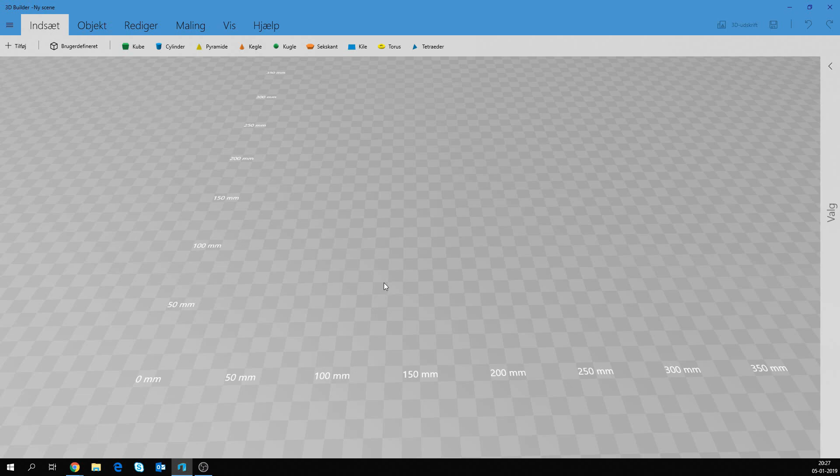Right. So next step is we're going to the computer and make our first model of this. Maybe there'll be many models, maybe the first one will fit reasonably well and we'll be done. We'll see.

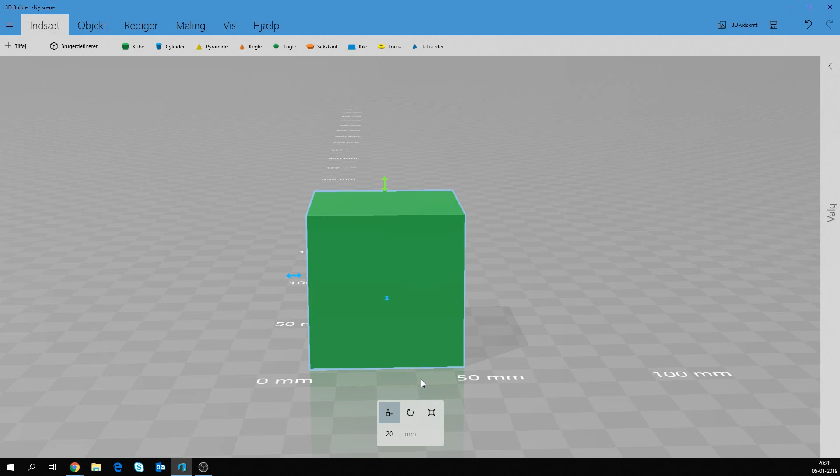Okay, so here we are. Now what I'm using is 3D Builder, and that's because it's really easy to get going, for two reasons. First of all, the program itself is pretty easy. You can't do any very advanced stuff, but at the same time that also limits the things you can mess up.

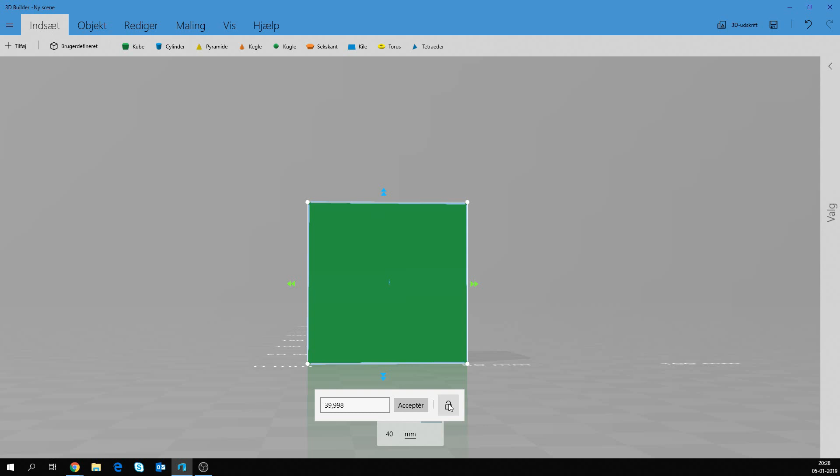And it's ready - if you're running Windows, it's readily available. In fact, it might very well already be installed on your system without you even knowing it, because it got pushed out together with an update like a year ago or something. And if not, you can simply go to the Microsoft Store, the built-in app store thingy in Windows. You can go to that and simply download it for free. So yeah, you can very quickly get going.

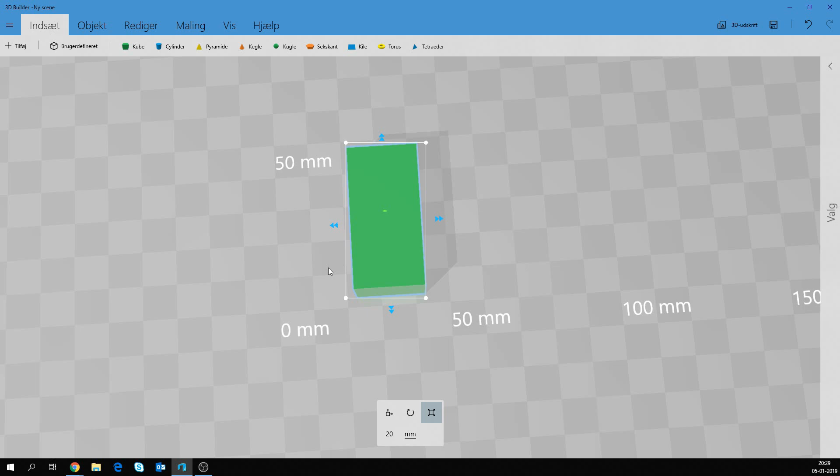So what I want to do here, I think what we're going to try to do first is create the basic shape that we want here with just a cube, and then we're going to cut out the stuff we don't need inside of it.

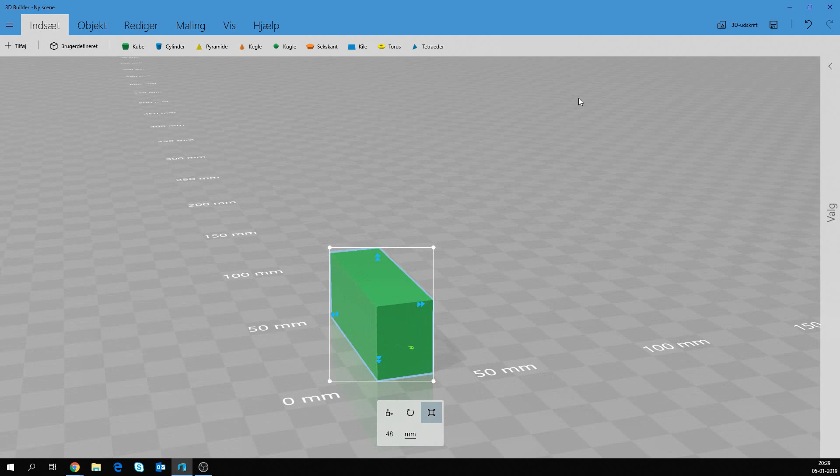So first of all, I think those brackets should be - let's go with 2 centimeters wide. So that we'll have it on, this will be the side view, so we want the top down here. Move, scale, and then we can go in here and remove the lock, otherwise it will scale all sides and not just the one dimension that we want here. That was the wrong one.

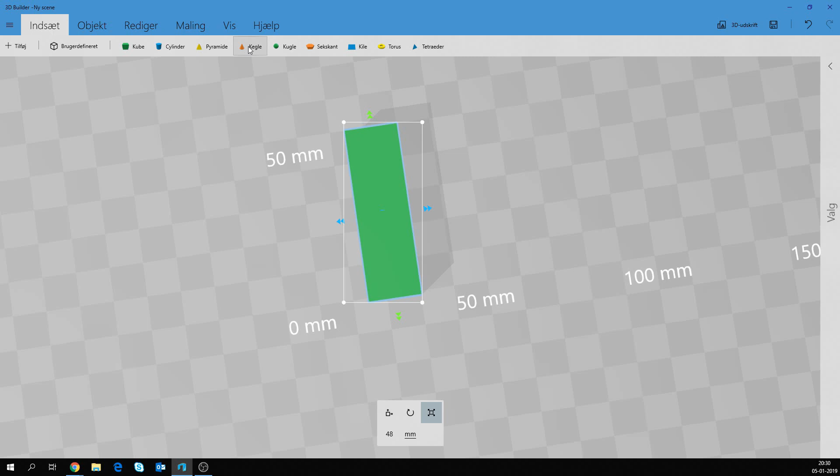So we'll try that again. Okay, so now it's too high. We'll move it down to be lying flat. And then we need it to be - let's see, that was 1.3 centimeters wide, that bracket. So, and we want it to wrap around on the one side and wrap around on the other side. So we need to add a few millimeters.

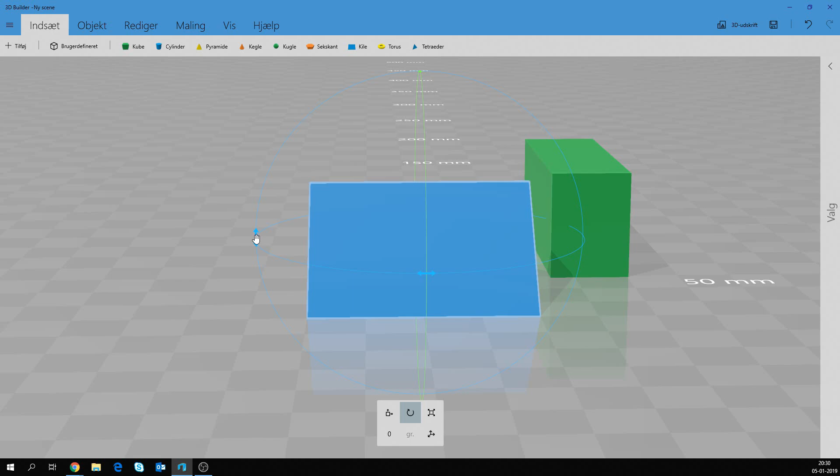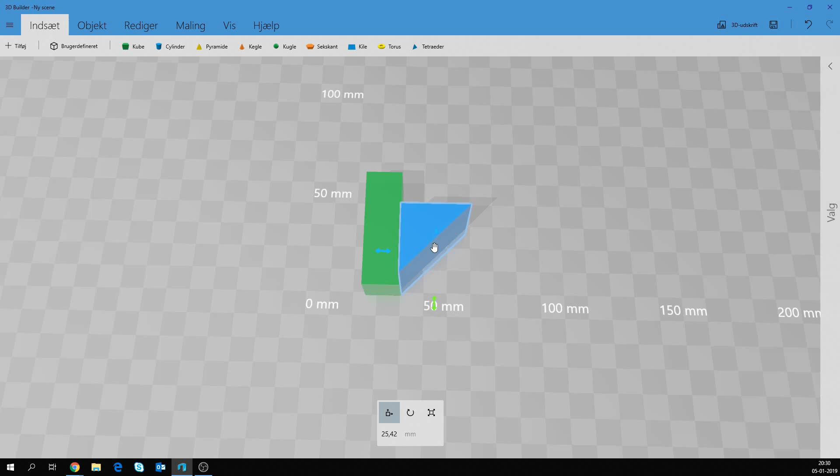So let's say we go with 1.6, then we'll have 1.5 millimeters on each side for the actual bracket here. So we'll go 16 millimeters wide. And then tall, we'll do the same thing. It was 1.4, I mean, so we'll go 4.8 - 48 millimeters. So that's the basic thing we're going to cut out our thingy from. Now we want a triangle.

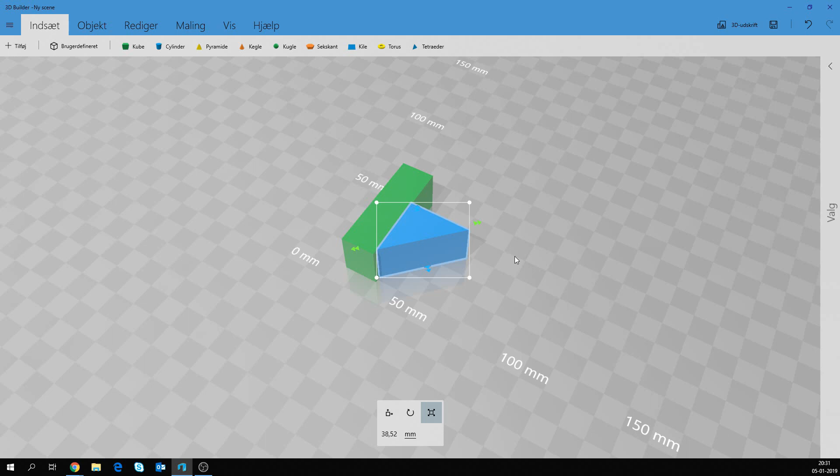What the hell? Not a pyramid, not this one. So if we look at this, we can see that we have - what the hell? Yeah, that's something we don't get a straight triangle with a 90-degree angle. Well, you do, that's at the top, but we need it to be at a totally different angle that it won't lock to, so that's kind of annoying.

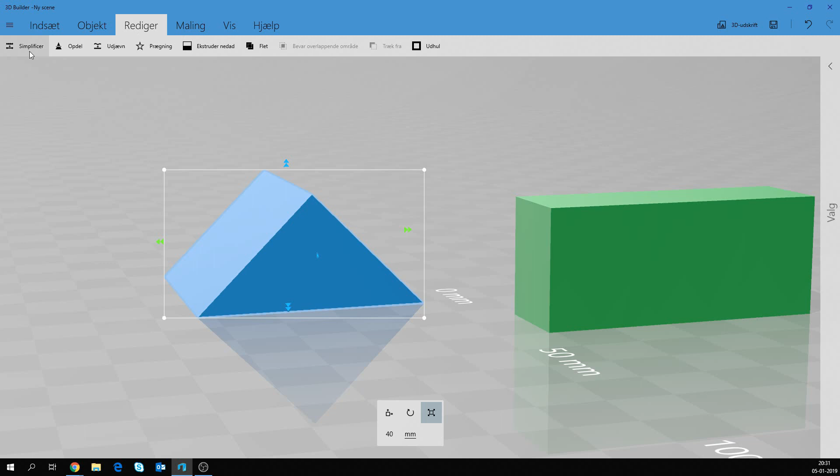But let's see if we can maneuver it into place, otherwise there is a little hack we can do. Basically just want to do - yeah, we'll just do like this. That should fit. So that will be our 45-degree angle here. So we'll move this down there. And we just need to scale it. So go to this menu and do the same thing. It's unlocked, 20 millimeters high.

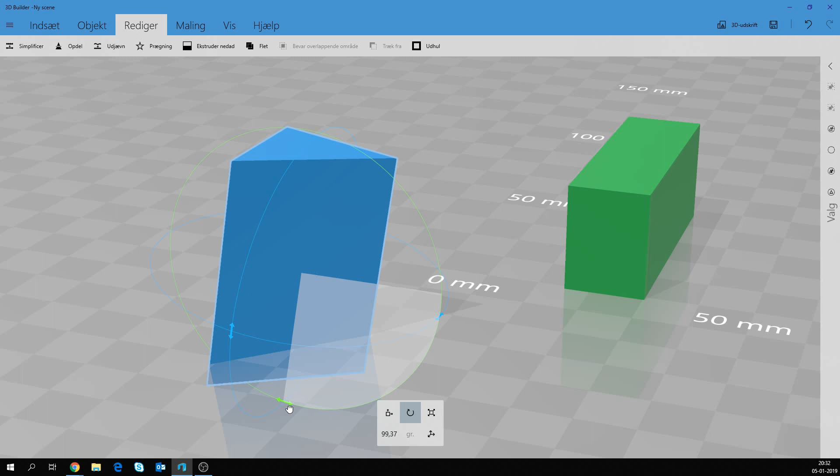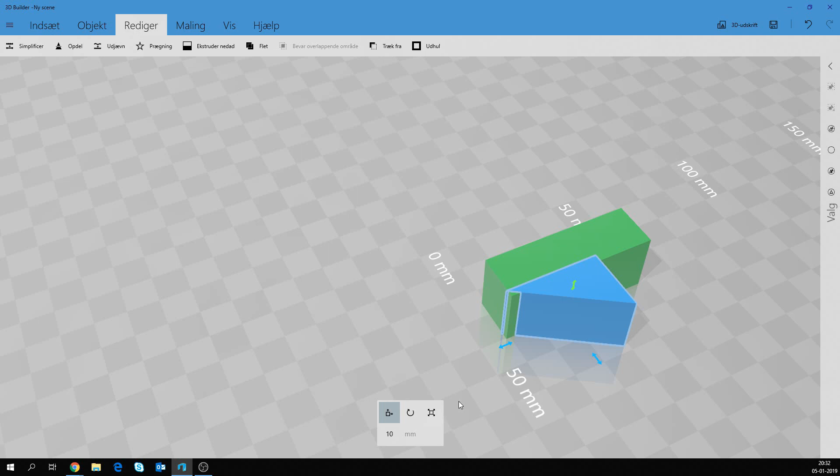Yes, and now the problem is we can't actually just tell it that this side should be that, which is a problem. So what I usually do in a situation like this, where the angle is on the wrong side compared to how we're scaling it, is take our triangle here when we go into edit.

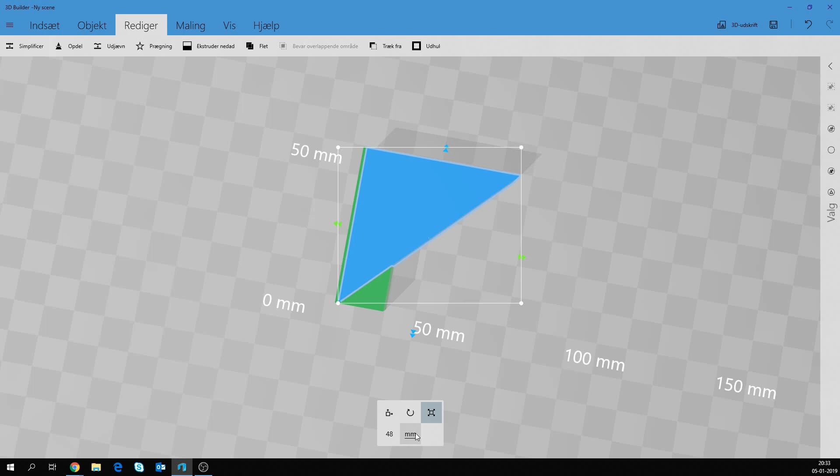You saw this is running in Danish, but it should be in the same positions. So we go to the Rediger, or edit, menu. We're gonna cut it, at a 90-degree angle, we'll keep one of them, it doesn't matter which one. I'll try to rotate it into place again, the other way around, 90 degrees, move you over here.

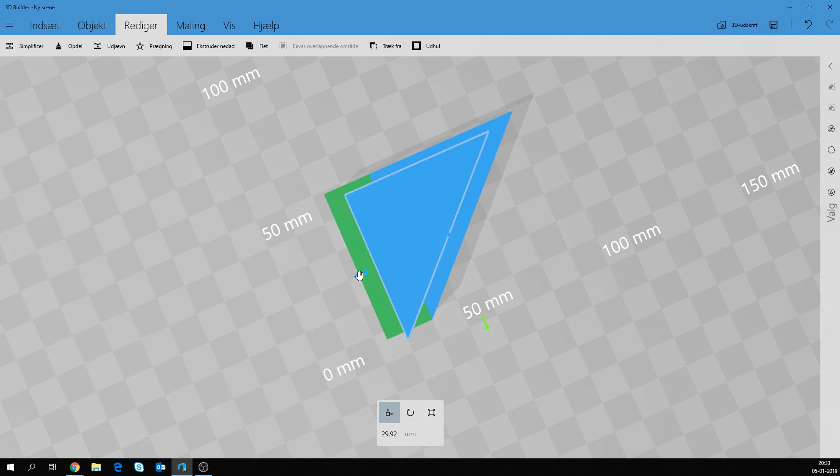Then we'll say we want you to scale 20. And now we can move it into place. Now we can actually drag the right side of it, the right orientation compared to what we want to scale here. So we can put that there, and scale it again the other way, up there.

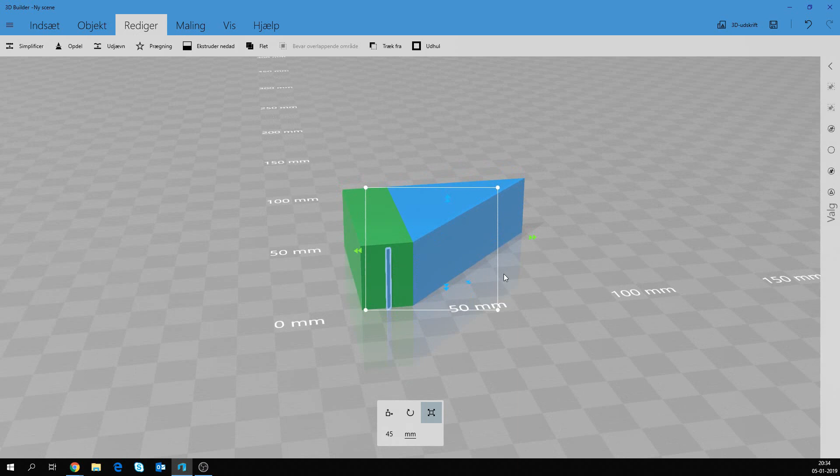Let's say 48. This should snap onto there now. So if it's 48 on that angle, then we also want it to be 48 on the other to maintain our 45-degree angle. So that'll be 48.

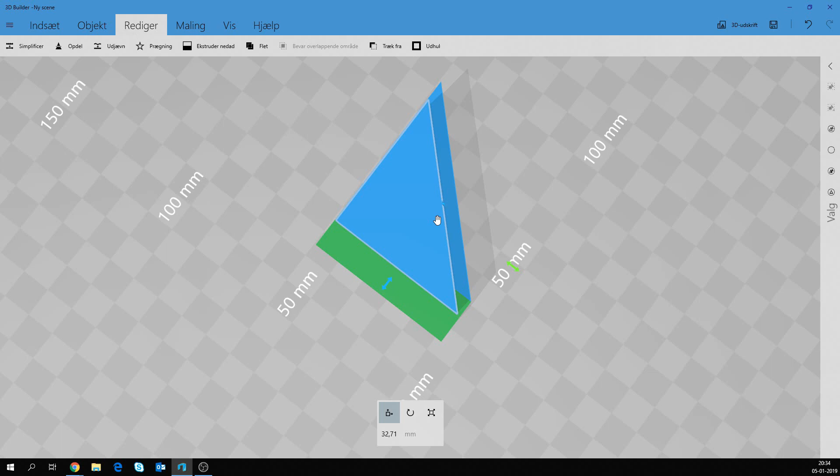So this is our basic shape now. Oops. Well, if I can stop messing around with it.

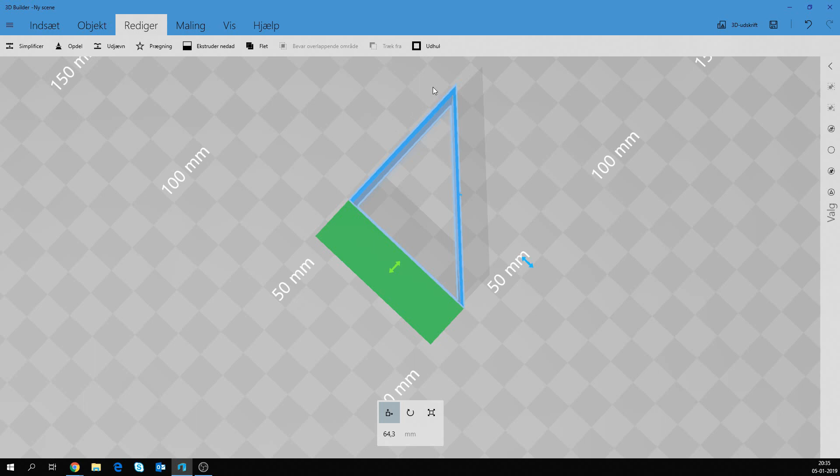So now what we want to do is cut out the inside here. Basically I'm gonna take this and make it slightly smaller. We're just gonna scale it in percentage. Could just do it in percentages, let me think about that. But I can lock it again, so now it maintains the scale on all the axes.

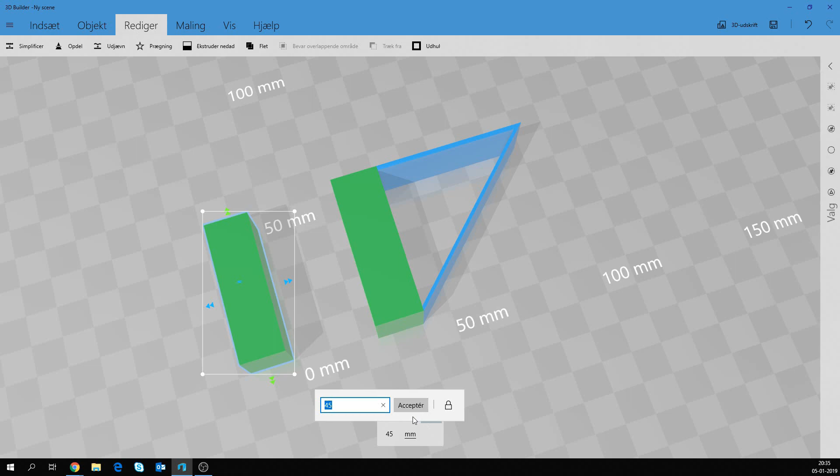And then I'll say we want this to be 45, because then we're keeping the stuff that we wanted. And then I can go back in here and say unlock this, go with this one up. Move this in here, and then find the right spot, roughly there.

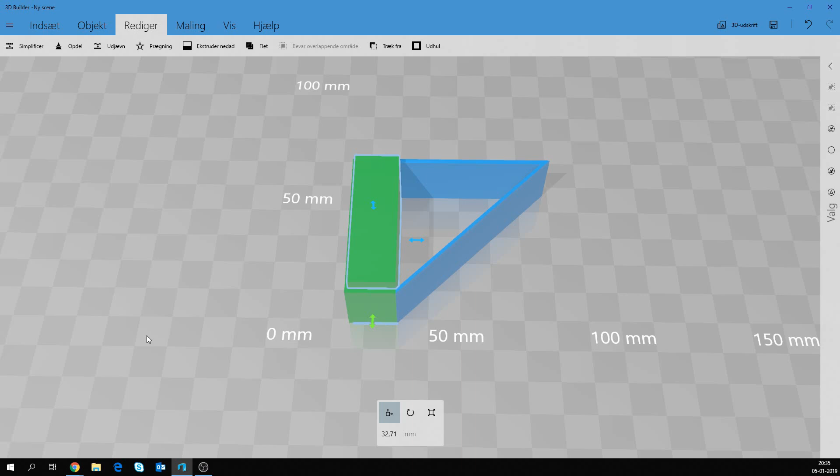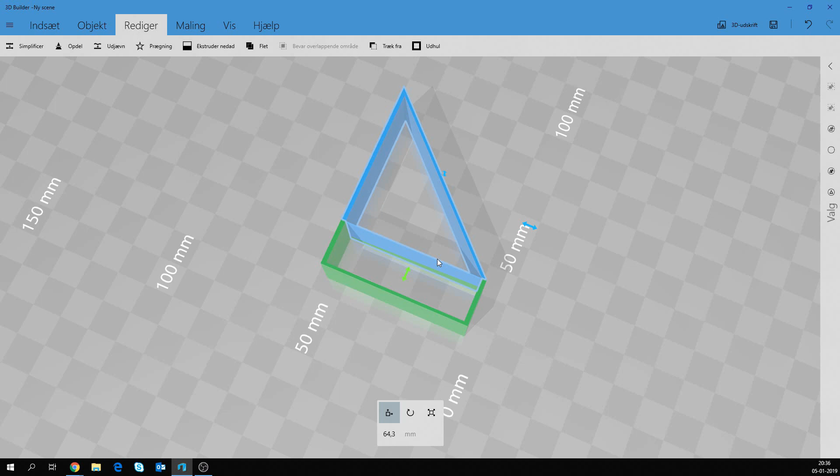If you do like that, so we can do træk fra, which will remove the inside here. So we see, now this is hollow. It looks too thin, probably. So we'll probably need to make it stronger, but we can just make sure it actually fits first, and then we can work with it.

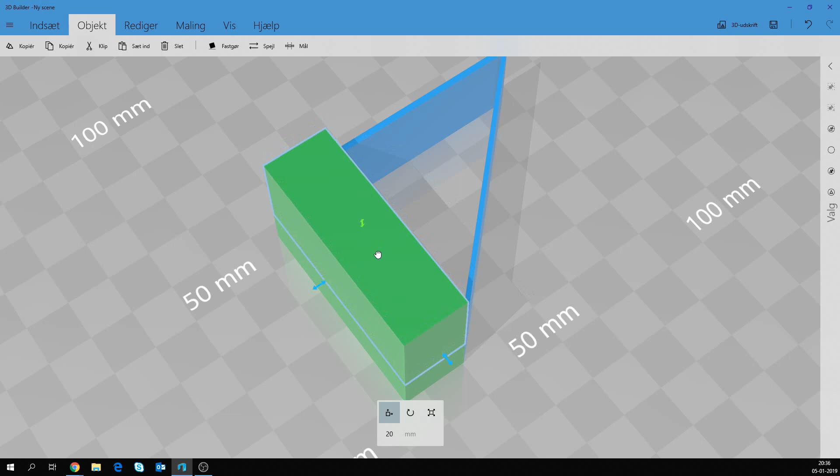So we can go and do the same thing with this and say, well, we want you to scale down to, lock this again there, 45, unlock, pull this up, and then we want to lock you to that side, drop it.

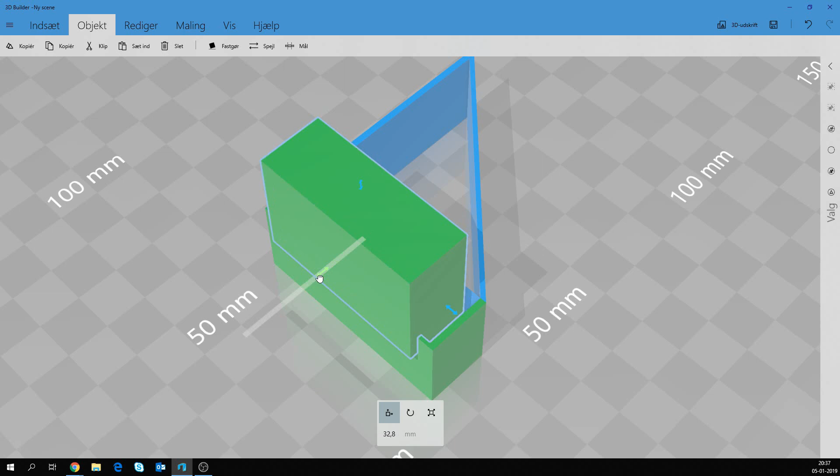Now the thing is, with this we can't quite do the same thing, because we need those tabs down here to hold on. But maybe they don't actually have to wrap around. Maybe it's enough they just go to the side there. I'm thinking that might actually be enough.

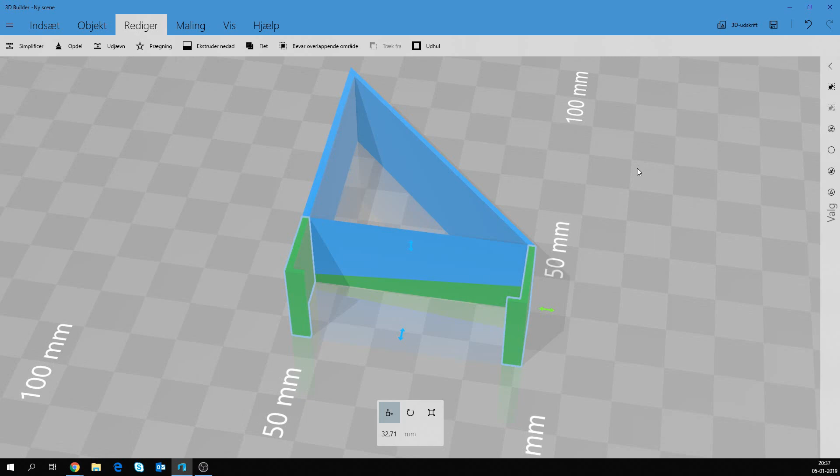So if we just remove that—oh yeah, that sometimes happens. That's really annoying. I'm not sure why, but sometimes this keeps something that's less than you can measure, but it just keeps that side there. We'll clean that up afterwards.

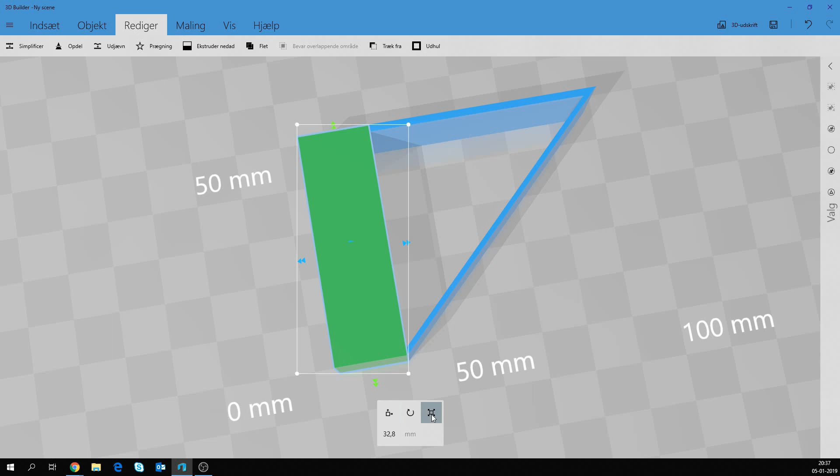But what we could do is do this, and then we can maybe get this back here. Because that doesn't matter, but really what I just want to do is make something that, if it wraps around like 2 millimeters each side, it'll be 45, 41, let's just go 40.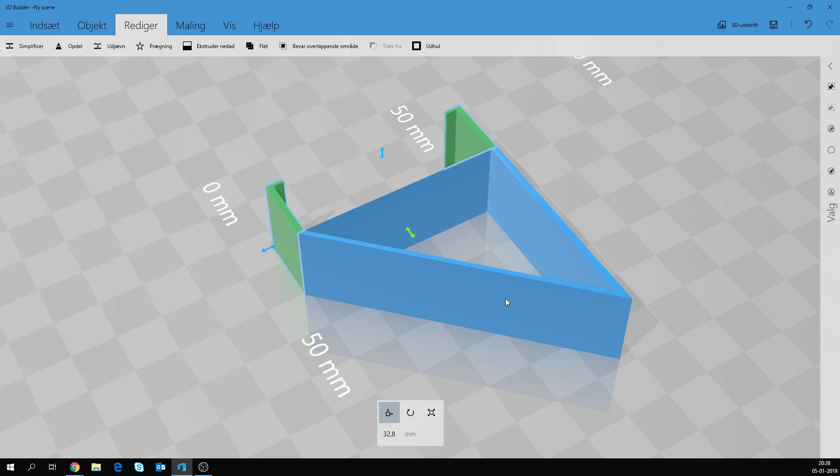And then move this here, drop it down, and make sure it's in the middle there. Yes, so again, remove that. And we've pretty much got our basic shape, except we've got this annoying thing in the middle that's actually not supposed to be there.

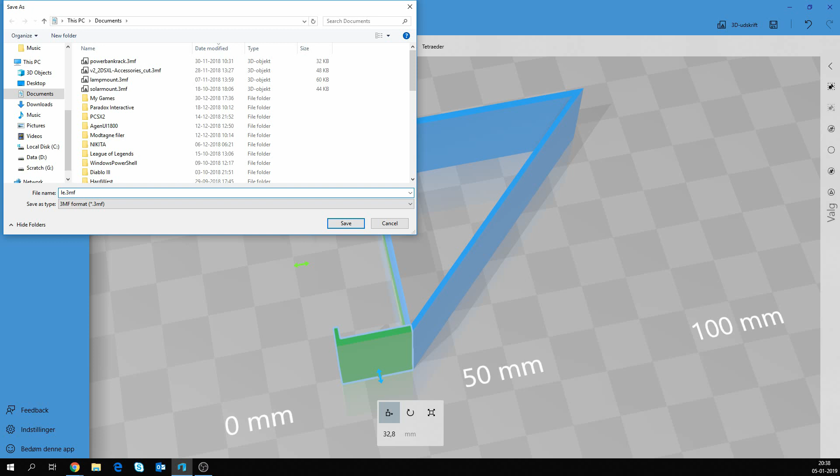Let's see if I can get rid of that, it's the easiest way to do that. If we just do this again, 45. Move you this way, and I'll cut that, I'll cut it down there. That's not good.

So this is an annoying bug, because I really consider this a bug. It shouldn't leave that there, it really shouldn't. But let's just try sticking this into a slicer, because it just doesn't really matter.

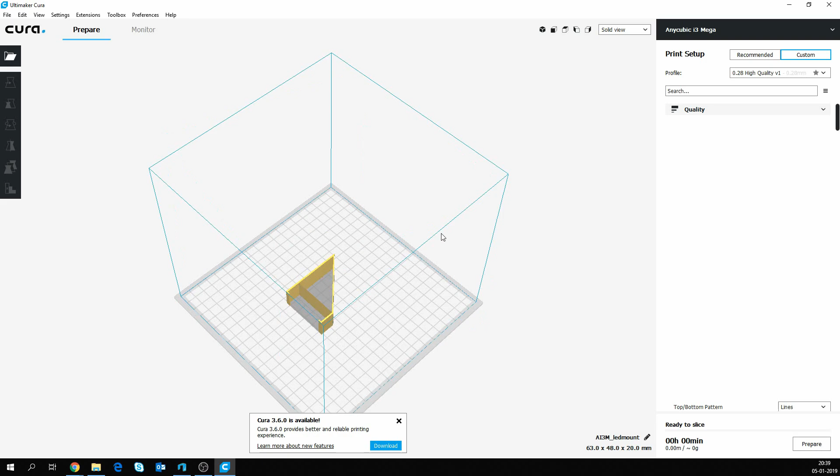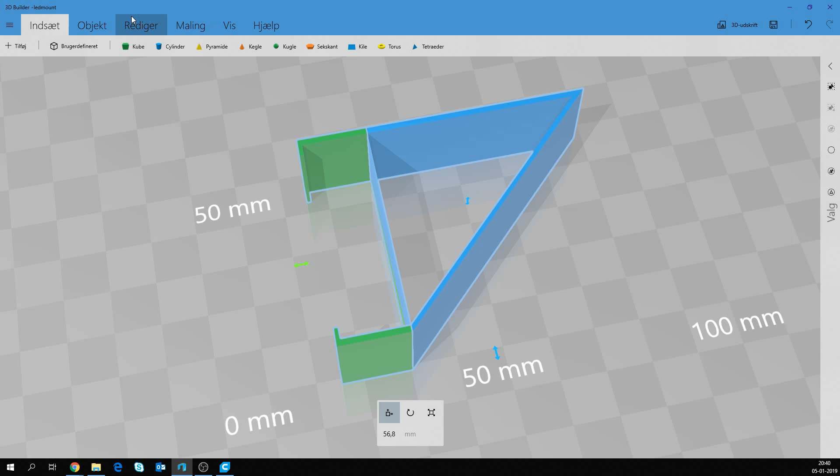So we can go and save this as something, some other stuff that I actually made myself. LED mounts. Yes, and we can also save it as an STL, and also it's gonna do some animation. We don't care, so I'm just gonna go and open this up in Cura instead, and then we'll see how it looks.

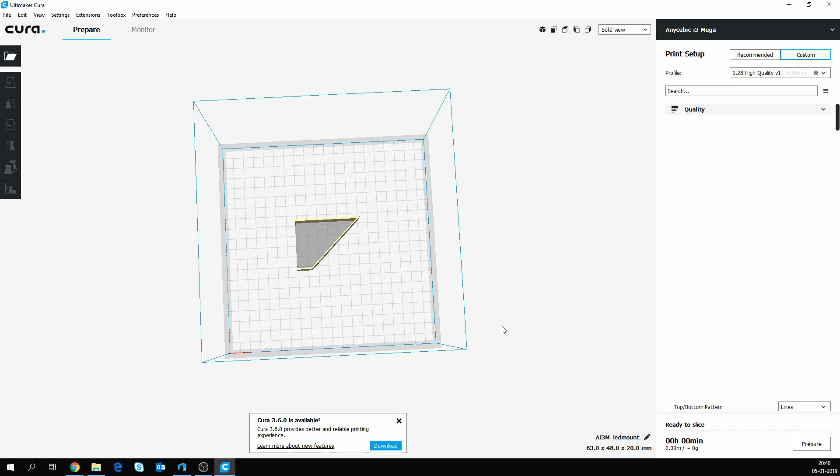I forgot one thing, and quite possibly Cura is gonna complain, but we'll see. Cura is loading. So unfortunately, it kept that thing there, even though it's just a shadow. I'm not sure it's even gonna be there if we slice it.

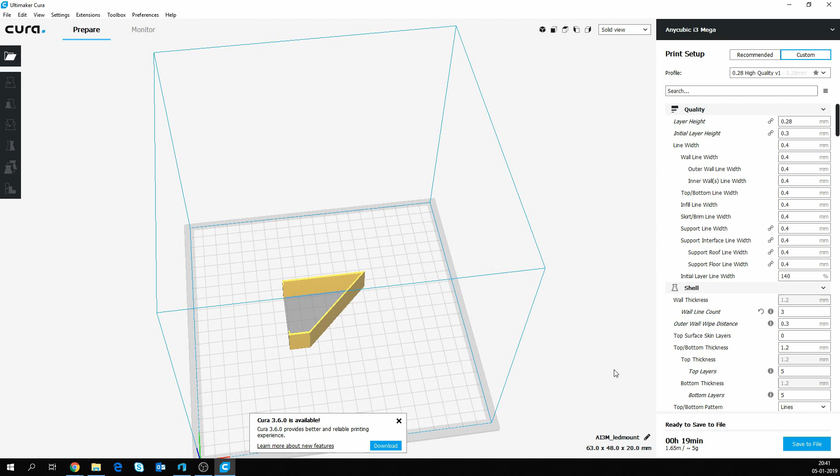But what I did forget is to actually make this into a solid object. These two are actually separate objects in the STL, which sometimes messes things up. So we can go into the edit menu, and there's a combine option, which it should have done now. And now it actually dropped that. Nice, so we can again go and resave this and reload Cura.

Here we go, so now we have our thingy. We can try and prepare it, and it says it'll take 19 minutes to print.

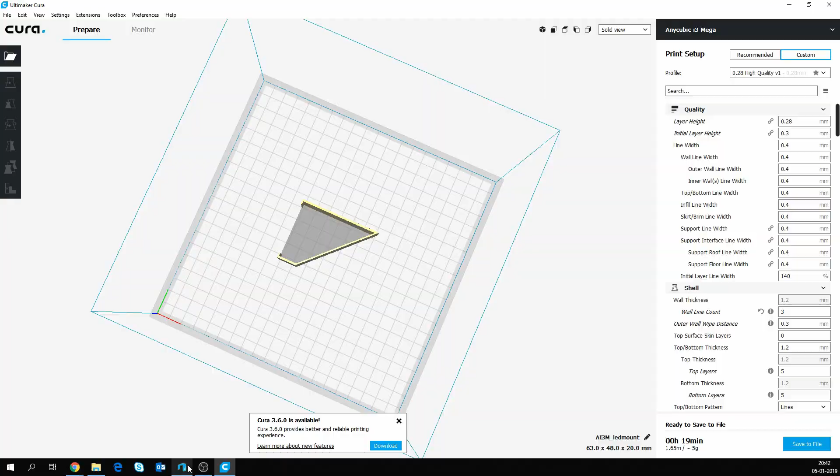So even with me moving the cameras around and stuff, this whole video has taken less than an hour to make, and you could realistically have this done within an hour. What you do from here is just rapid prototyping.

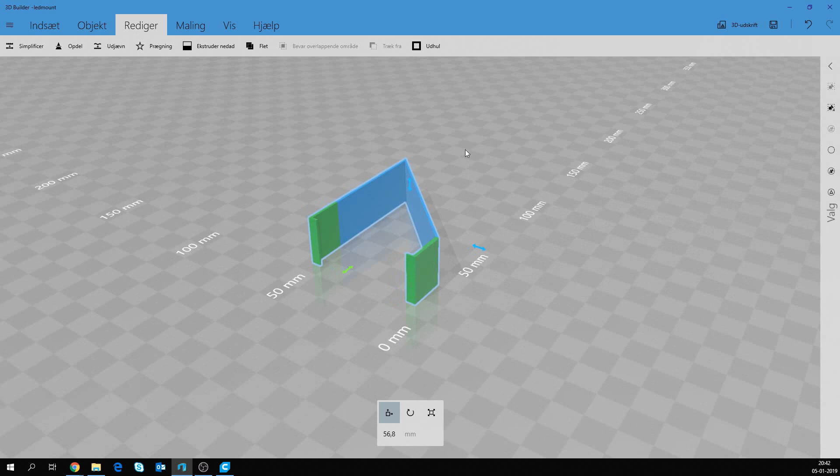So you just iterate. If this doesn't fit completely, you take your measurements, you measure this part and see where did you go wrong. You alter the design, you do a new print, and you just keep repeating until it fits. And it only takes 5 grams of filament.

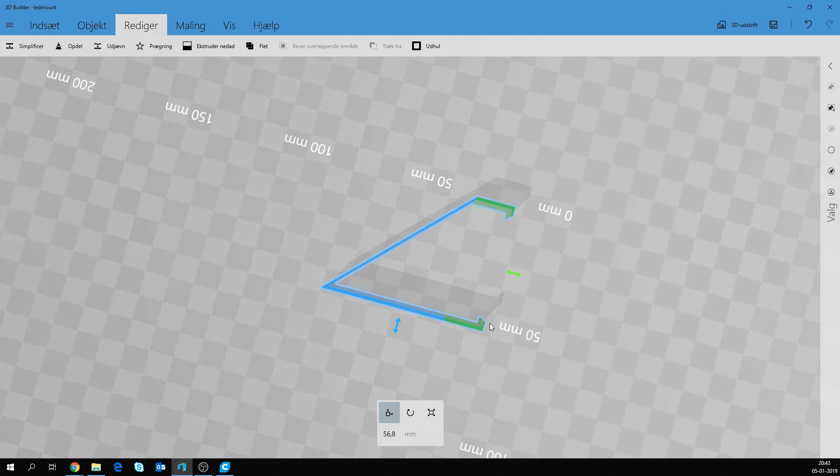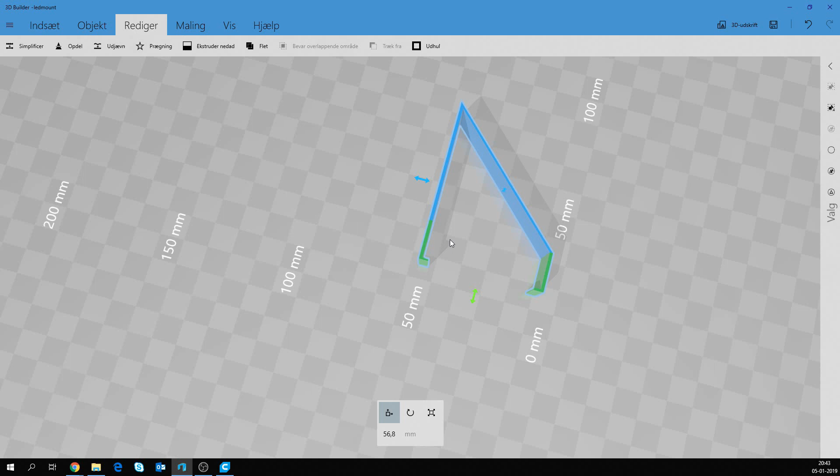I haven't actually set up any cost for this filament here because it's running the TPU profile apparently, but it doesn't matter, it's a few cents really. It's just more efficient quite often to do it with this approach rather than sitting and fine-tuning the 3D model for hours and hours to make sure it works the first time you print it. That's really the advantage of having a 3D printer, because if you're producing something industrially with injection molding, you'd need to get the mold done, and that first one would be very expensive to make. But since we can 3D print it, it really doesn't have to be.

Now if I look at this, there's a few things that might need to go into the next version. This here could probably do with some strengthening, so I'm thinking some sort of crossbeam down here would be good for strength. We might want a tab here because it could possibly pop out. The bottom one probably doesn't matter, but the top one, if we went in here and had a small piece that grabbed around the thing, that would probably help. Otherwise it could potentially pop out, but it's actually going to sit underneath the shelf that's laying on top of this, so it might be enough to keep it down. So that may or may not be necessary.

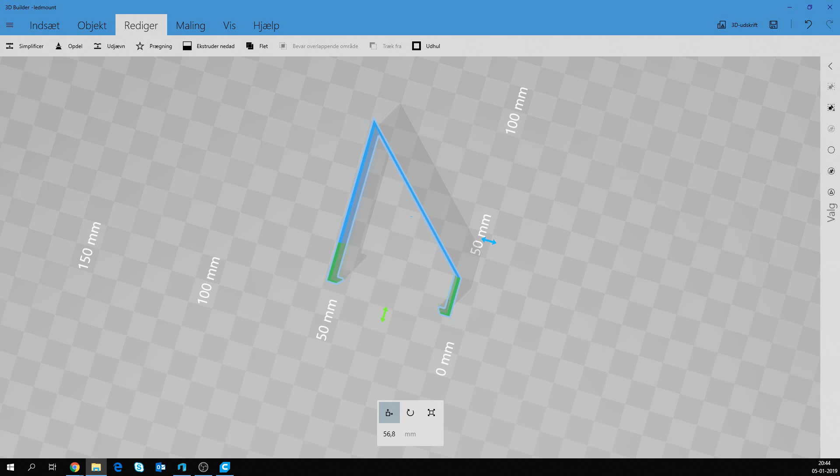But really in this first iteration, I'm just concerned with the fit of the thing. I'm gonna try and print this and see if it fits, and then I'll do this process again if it doesn't, until eventually I'll have something that works. The whole point of this video is that you can easily do the same. It really doesn't have to be very hard. Just fiddle around with it, do a test print, see how it fits. That's how you do it.

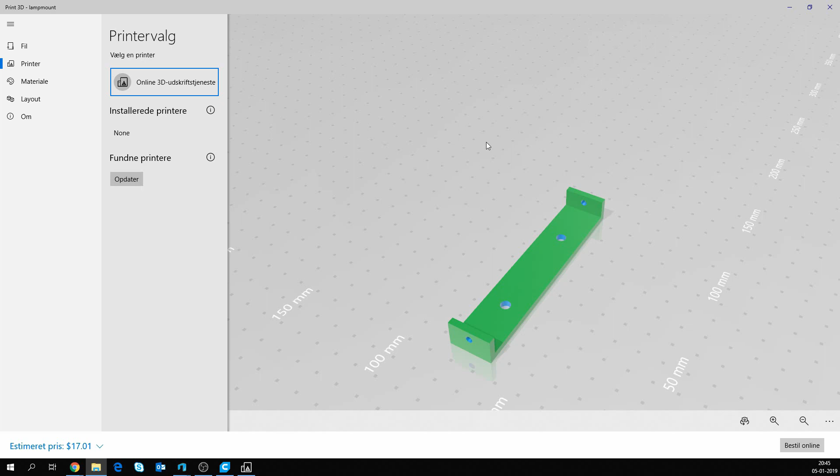Let's see some of the others I found in this folder here. This is a rack for power banks. I have a lot of the same model of power bank, and they're just laying around, so I made a rack where they fit in and can stand while I'm charging them. That's one thing I made, and I've printed 3 of those and they work perfectly.

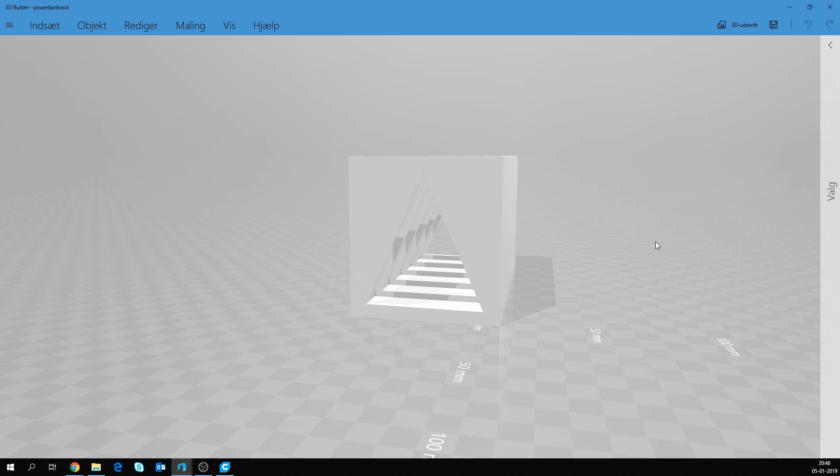Let's see what else I have. I made this, and that's just something I altered. I made a lamp mount for my mother, quite similar to what we just did now. This is a mount for a lamp - she bought 2 used lamps, but it only had 1 mount, so I had a look at the existing mount and made a copy on the printer, and it's holding her lamp right now. That really took me maybe 30 minutes.

So you can do it. I'm really bad at graphical design and 3D stuff and so on, but I can do it. You know, just put your mind to it. That sounded kind of lame, but whatever, I mean it's not as hard as you might think.